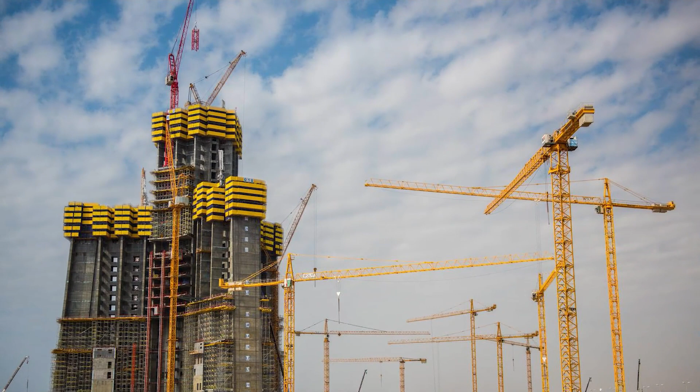Jeddah Tower has long been a source of contention for many. The development is a mega skyscraper that would soar a kilometer high over the city of Jeddah. That is, if it ever gets completed. And that's a big if. After 5 years of inactivity, its supporters still remain hopeful for a project restart, but its critics take a more pragmatic stance that it is fully abandoned. Whichever way you slice it, the one question remains: will Jeddah Tower ever be completed?

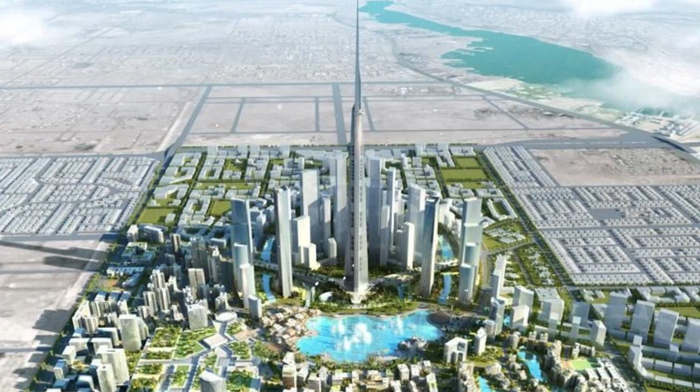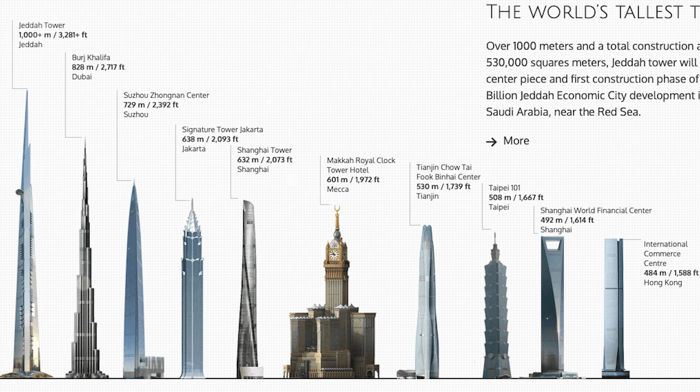Today, the Burj Khalifa is the tallest building in the world as it towers over Dubai at 828 meters tall. The Burj Khalifa is impressive, but upon its completion in 2010, the question was quickly thrown out again. What's next? Enter Jeddah Tower. Back in 2008, Saudi billionaire Prince Alwaleed bin Talal announced his ambition to build the world's tallest building at 1,000 meters or more. The buzz around Jeddah Tower is not unfounded. If it ever gets completed, it will dwarf Dubai's pride and joy with almost 200 meters to spare.

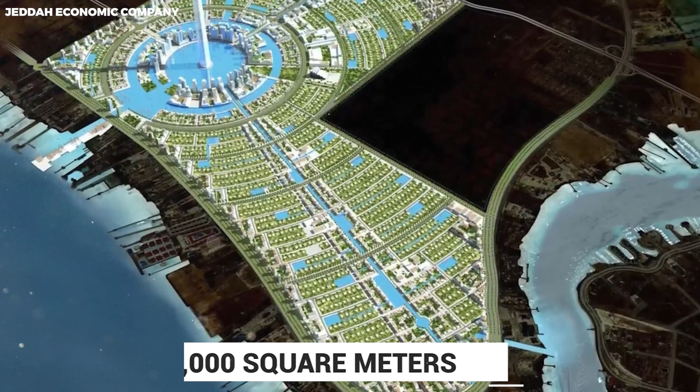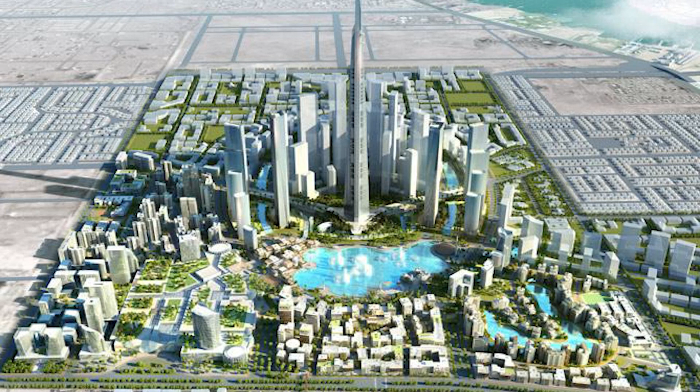Clearly, size does in fact matter. But this was always more than just size. It spoke to the region's ambition too. With a total construction area of 530,000 square meters, Jeddah Tower was set to be the crown jewel of a $20 billion development known as Jeddah Economic City. This shiny downtown district would help diversify its economy away from oil by drawing international interest with its cutting-edge technology and modern amenities. Jeddah itself is strategically located between the two holy cities of Mecca and Medina. And if successful, the development would position Jeddah to be at the forefront of modern cities, perhaps even enough to rival downtown Dubai.

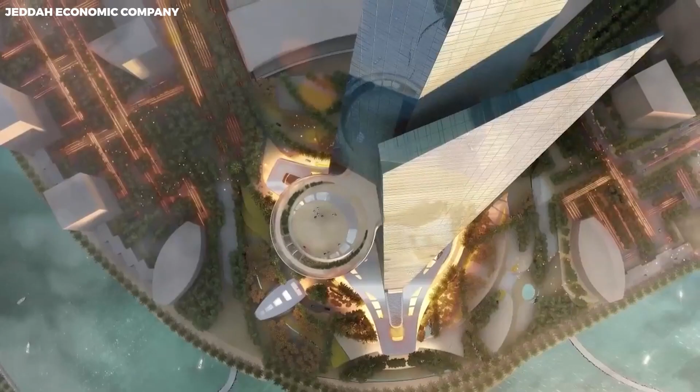Jeddah Tower itself will be a $1.2 billion mixed-use building featuring a 5-star Four Seasons hotel, luxury residential units, and ample office space. The project will be equipped with hyper-fast elevators that will rocket visitors through its 167 floors, and will be home to the world's highest observatory at 664 meters off the ground. With such high expectations literally at stake, the project tapped renowned American architect Adrian Smith, the very same man who also designed the Burj Khalifa. With that project done and dusted, he was ready to tackle even greater heights with Jeddah Tower.

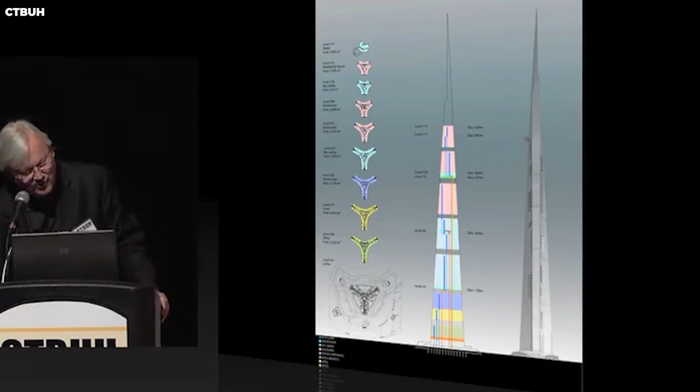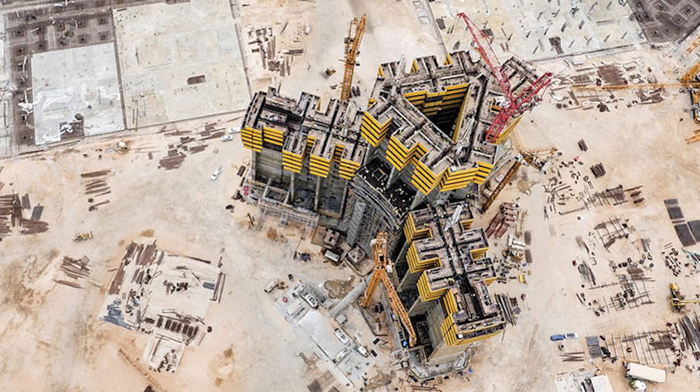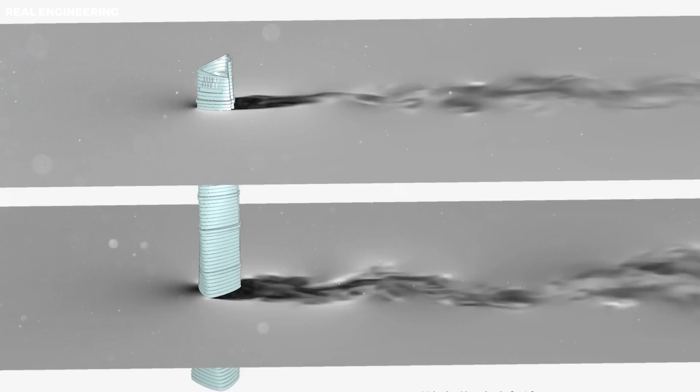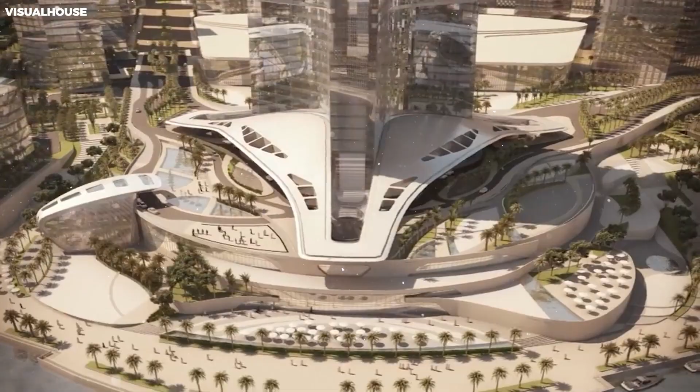The building design is sleek and streamlined, inspired by the folded fronds of young desert plant growth in Saudi Arabia's landscape. Most skyscrapers have 4 external walls, but similar to the Burj Khalifa, the design of Jeddah Tower's 3 Y-shaped walls are intentional. Through extensive wind tunnel testing, Smith and his team of engineers found that this 3-petal footprint would make the tower more aerodynamic. Its tapering silhouette also maximizes usable area at its wider base, while its narrowing core helps the tower withstand wind shear at its peak. Gill-like indentations lend another dimension of visual intrigue, and a high-performance exterior wall system will minimize energy consumption. Each of the project's 3 sides also features a series of notches that create pockets of shadow to combat the scorching desert sun, and provides outdoor terraces with stunning views of Jeddah and the Red Sea.

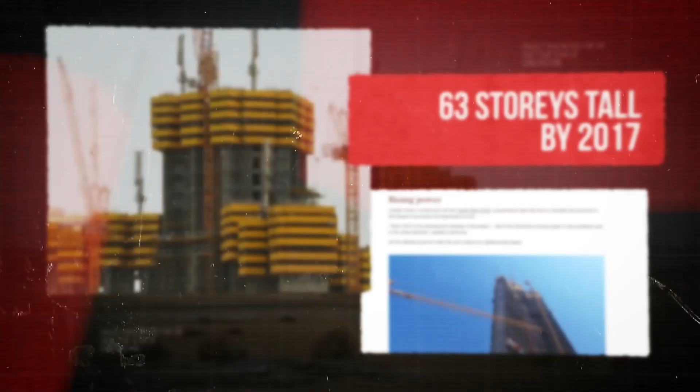Construction of Jeddah Tower officially broke ground on April 1, 2013. In its first 4 years of construction, the project was pacing well, with the structure rising 63 stories above the desert land by 2017. But then, all progress came to a screeching halt. In January 2018, with 1/3 of the tower completed, building owner Jeddah Economic Company suspended structural concrete work due to labor issues that coincided with the 2017 to 2019 Saudi Arabian Purge. When Saudi Arabia Crown Prince Mohammed bin Salman came to power, he led anti-corruption purge efforts that rounded up those who opposed his leadership. Jeddah Tower found itself caught in the crossfire as its key backers were arrested as part of the crackdown. Construction eventually continued after they were released, but then the COVID-19 pandemic hit, causing all work to stall through the present day.

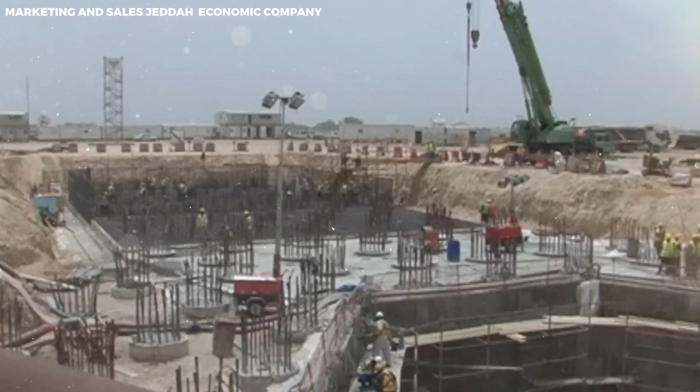Today, the orphaned tower sits desolate and incomplete, a mere stump in the ground. It now serves its reassigned purpose as yet another billion-dollar grave in the desert sand. With that, the amount of scrutiny surrounding Jeddah Tower is unrivaled. Was this mega skyscraper just too much of a tall order? Why is construction not continuing? What will happen to the whole Jeddah development? Amidst the sting of endless criticism, project officials still put up an optimistic front. On their website, Jeddah Tower is described as a skyscraper nearing its completion, with the paragraph stating that its third phase is yet to be revealed.

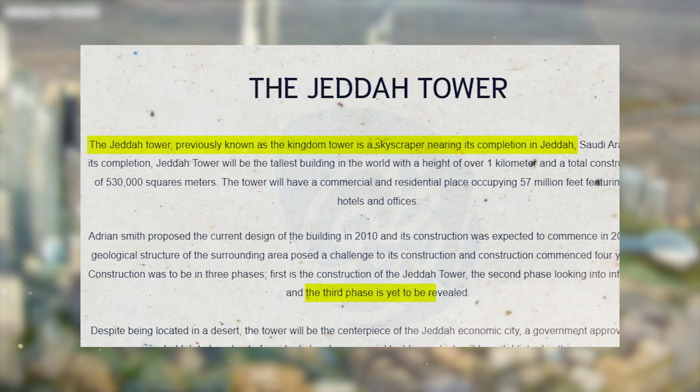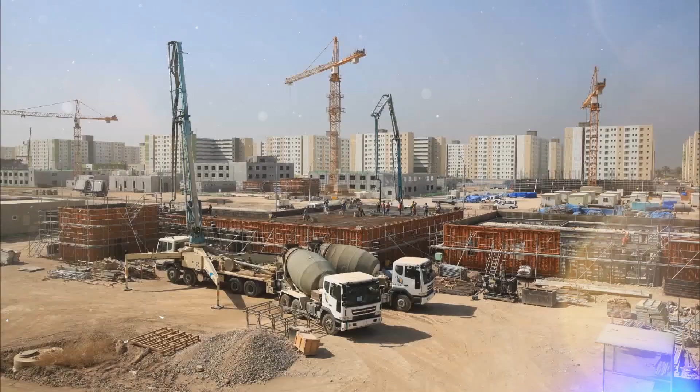There have also been whispers of a potential restart of the tower, but the project has lost its momentum. A barrage of challenges such as politics and funding continues to mount against the development, and a dry spell continues to plague this desert region. No matter how project officials spin it, Jeddah Tower is not running behind schedule. It has completely stopped construction for 5 years now. With that, all eyes are on Saudi Arabia's next move.

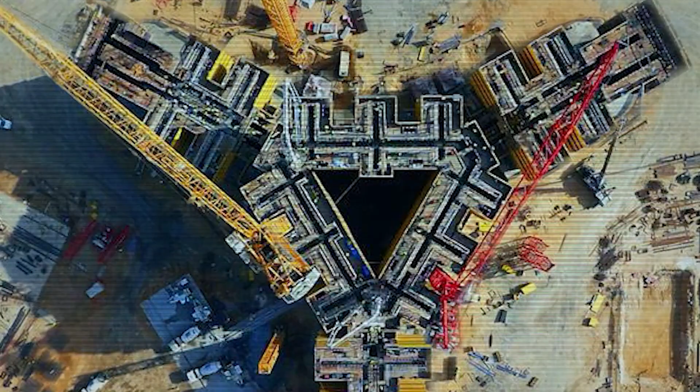The completion of the world's first kilometer-high building would be a record-breaking achievement in modern architecture, and an extraordinary feat for humankind. Until then, the Burj Khalifa continues to stand proud and tall with no challengers on the horizon. And Jeddah Tower continues to wither away in the desert sand, never living up to its splashy renderings as the sleek needlepoint structure that pierces the Arabian sky.